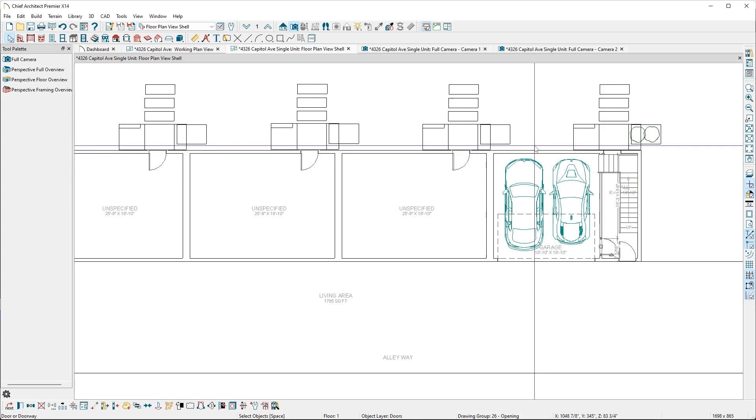They're typically about 2 foot wide, 5 foot tall. We'll have to talk to the HVAC company, but you might be able to do that and then put your air conditioning units outside. We are losing the basement space there.

Okay, when we go up to the living space, I want to get your ideas and everything before I make additional plans here, but we have run all the walls. We've got all the windows and doors set on the back here because we were able to. I just wanted to touch base with you on any changes that you wanted to make.

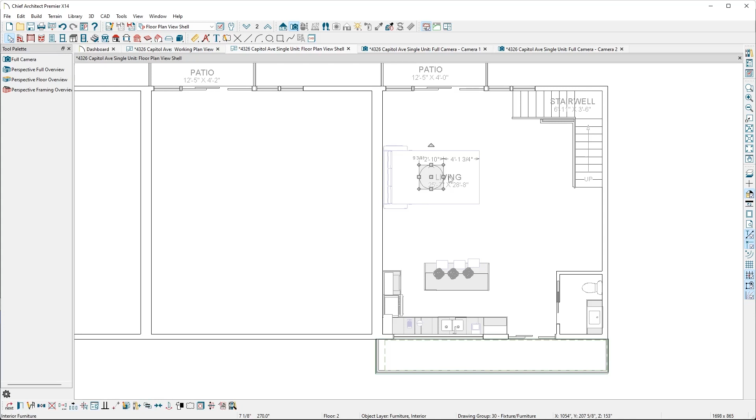Let me turn this crosshairs off. In the living space, before I did anything, because I don't want to take all that time and then say, oh, by the way, we're going to change everything. And I don't want that cost going on to you guys.

This room is much bigger than the Peak Street because you have all this area right here, which is hanging out over the driveway. So that's such a bonus here, where Peak Street was very, very small. You have a lot of space.

I have the stairs going up the side wall and over the back wall. Again, we have enough room to do this, so you would be coming up from the garage here, and if you needed to go up to the next level, it's all right here.

The more that you can keep your stairwells stacked on top of each other, the bigger cost savings to you, because they're creating just one structure in the corner versus having to create different structures on different floors.

We still have a bathroom down here, and let us know if you want to keep that. And I do remember on Peak Street you had asked about moving the kitchen over to this wall, and I want to know if you wanted to do that here as well.

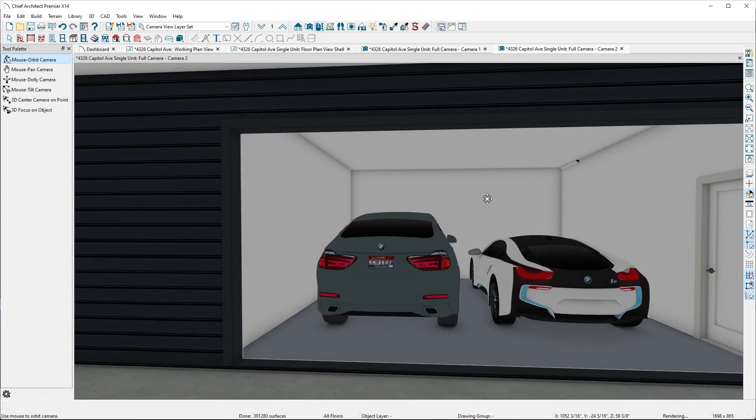So this is the garage level. We're still keeping it pretty similar in size. You can get some mid-sized cars in there.

Okay, and then, well, we've created all the fronts over here. This side we were able to keep very, very similar with the layout. It's the other side with the overhang, and we definitely need to discuss the third floor before we end this video and when you get back to us.

So this is an idea for the space on Capitol. Definitely a lot more space. I'll have to take these out.

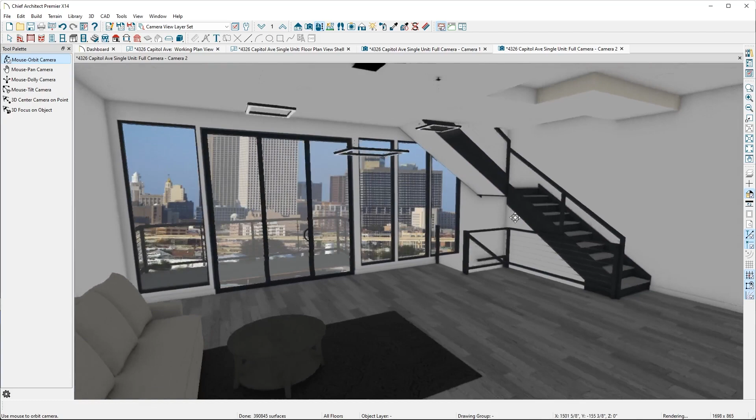That is where the island used to be in Peak Street, so I have not moved the lights yet, but you can see now that you have a very large area inside, and just ignore the ceiling. I pushed the wrong button there.

It's cutting out the stairwells and stuff. But you have a much bigger space up here.

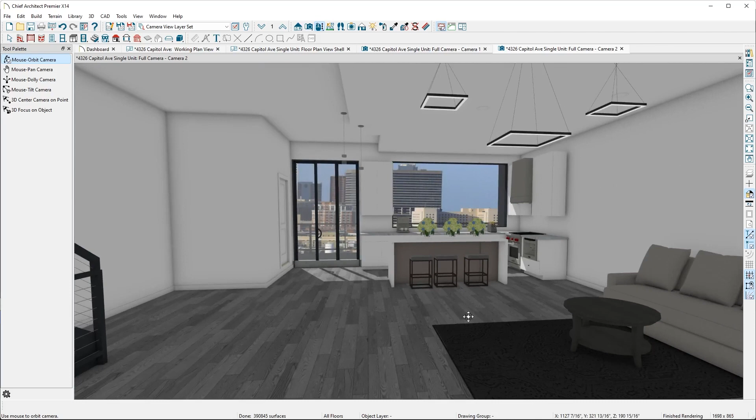So you could put a seating area over here. You could put shelving over here. You can keep the kitchen where it is. The kitchen can come out further. You can move the kitchen around. You can turn the island sideways and still have plenty of room for a living space on the second floor, on the living floor.

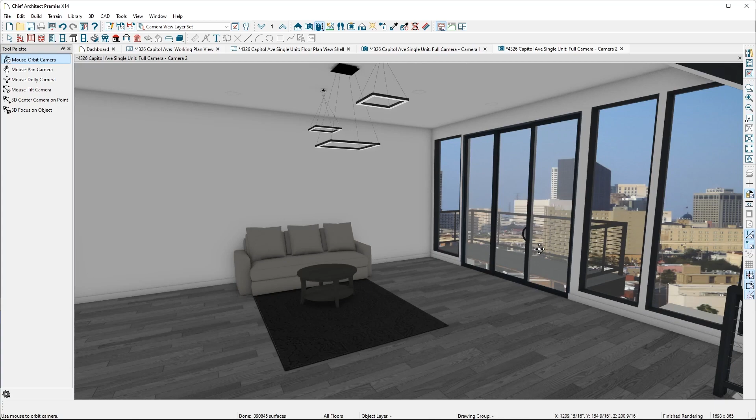Again, you'll have your doors going outside, and you'll have your doors to the patio. If you want this patio to extend all the way across here, you can do that also. The codes didn't have any problem with it going side to side, they just didn't want it any deeper.

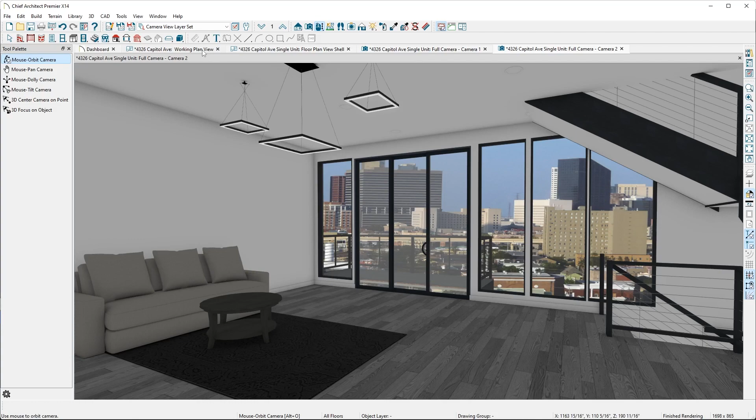Okay, and then if you go upstairs to the living quarters, this is where we have to just kind of think about it just a little bit more. Okay, these are the, I have two sets of plans running.

One plan is on the site plan, and then one is for an individual unit. So we're working in both of these plans, and we'll be combining some of those things a little bit later for ease for you.

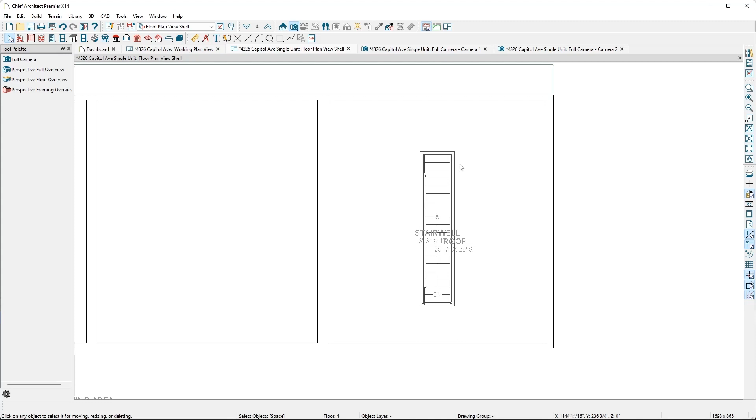When you come up the stairs here, we have a note for stairs going to the rooftop. Something to keep in mind is the city does not want you to put the stairs or any kind of bulkhead within 4 feet of the wall that you share with another property. So wherever you put the stairs on the 3rd floor, it needs to be 4 feet away from the adjoining property. If you put the stairs up the back, they just have to end before there.

As of now, we simply put the stairs right up the middle, just as a starting point. There wasn't enough room right here to put them. And if we put the stairs here, that works for this unit, but on this unit, you can't put the stairs here because they would be too close to this wall over here. So you can have a couple of options where maybe the stairs come here, they curve and come back. Just consider that. We have 10-foot ceilings, and I think we need almost 20-something feet to get the stairs up.

Actually, as a matter of fact, let me grab a tape measure. 17 foot 5 inches is what we call the run of the stairs. So we need about that much space.

Okay, so here's where I want to get your input. We did put a laundry room in here. There's a couple of bedrooms. Now, we have to have those windows going outside. Remember, we needed to have egress.

Now, an option for you is one bedroom could have a patio off the back, and we turn this into a bedroom. And this one would have no problem because they have this outside wall right here. But when we put this hallway here, it's fine, there's plenty of space and everything, but I would at least recommend that you put maybe some kind of lower shelving here. It just seems like a lot of wasted space just to get that egress.

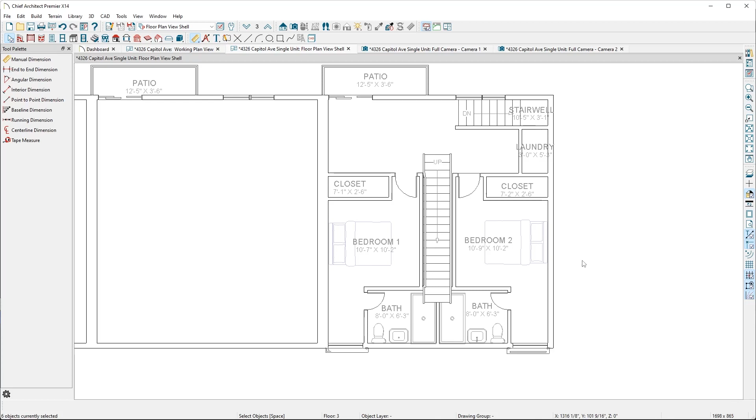So let me know if you want to have these kind of twin, mirroring bedrooms, or if you'd like to put a bedroom in the back and then kind of move the stairs over a little bit, or turn the stairs a little bit. And then there would be a bedroom on this side, and a bedroom on this side, and maybe some private office space here and here for each bedroom. That could be an option, but we definitely need your input on this. There's so many different ways to do this, and we definitely want your input.

Again, the main thing is that we keep the stairwell away from the corner or by the edges of the other buildings.

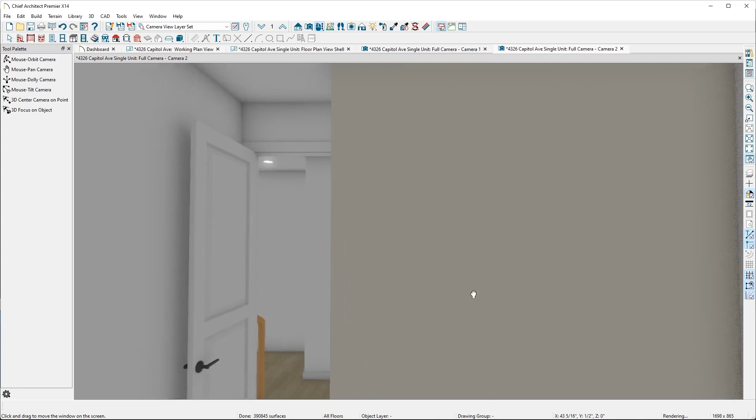And then if we go upstairs, there wasn't a tremendous amount to see here. Let me see if I can... these things are a little hard to drive. But if you come in right now, here's what I'm talking about. And it's not bad. I would definitely say if you're going to do this, then make that a door, or at least a full window if you're going to use that.

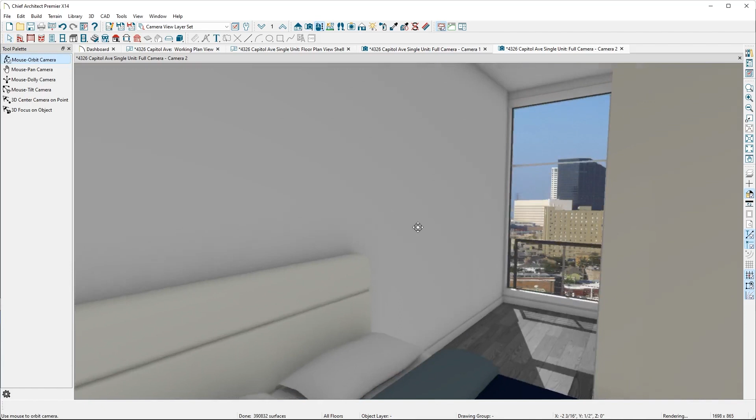And maybe somebody would like that area, just put a chair in there and keep the bedrooms the way they are. And your bathroom can be in here. It's not the end of the world. It's actually quite pretty now that I look at that. And then out here in this space, you could have that office or a seating area.

And of course, we changed these to metal. So that's kind of where we are right now. Everything is really super ready to go, as soon as we just put the layout together.

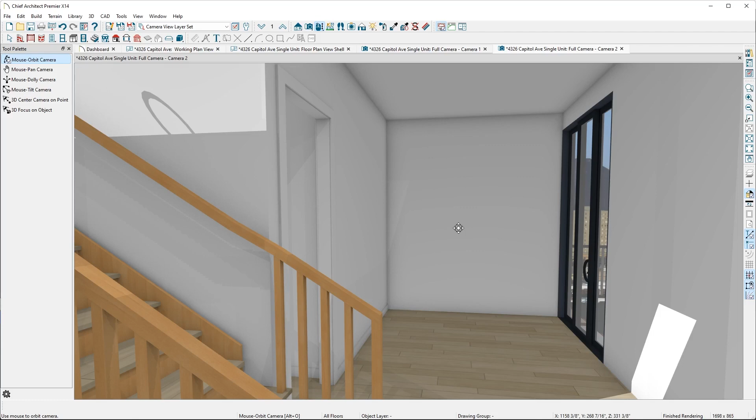Then after that, once you give approvals on your layout, it'll probably take us 5 to 7 working days to get all your MEPs and get all those details put together, your elevations and all the stuff that you'll need.

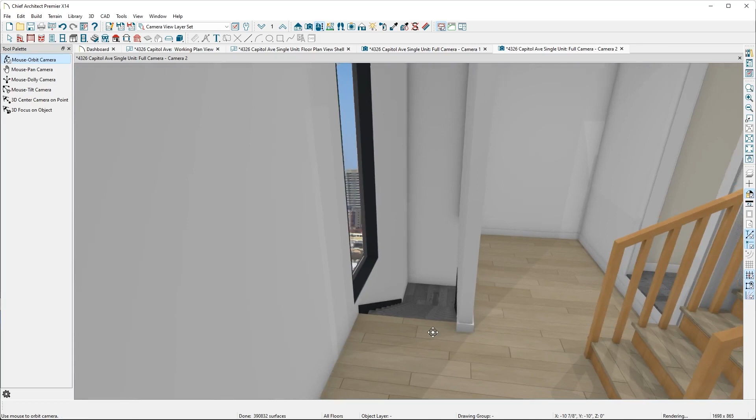Well, that looks skinny, doesn't it? You forget how tall this is when it's 10 foot on each floor and there's a 20-foot piece right there. And here's where you'd put that window on the corner unit.

So yeah, just let me know. I'll send a copy of these plans with this video so that you can take a look at it. And yeah, just let us know what direction you'd like to go on this, and then we will get those things taken care of.